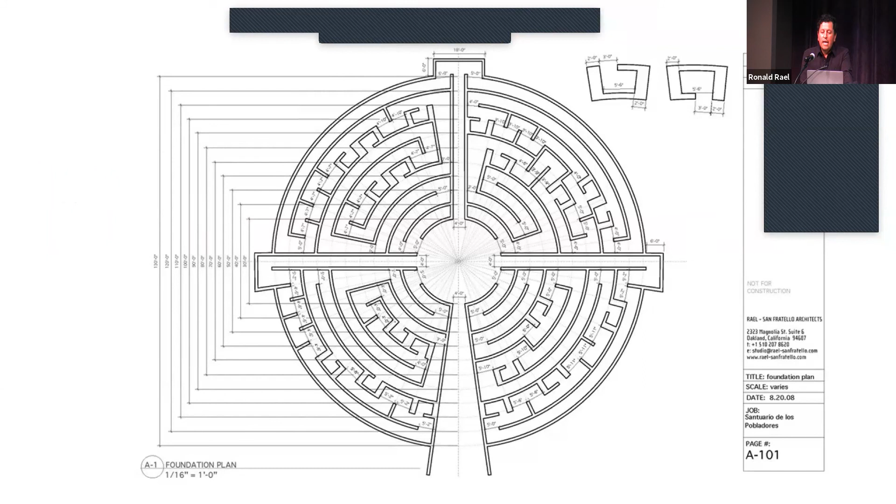But I've also worked on projects here in the San Luis Valley, and this one has been ongoing now for 13 years, in the town of Conejos, where we are building with the community of the Catholic Church there a labyrinth to celebrate and exercise the prayer of the Rosary. It's an enormous project that my creative practice designed 13 years ago, and in that second year it was explored in a smaller scale model using straw bales for the 150th year celebration of that church in Conejos.

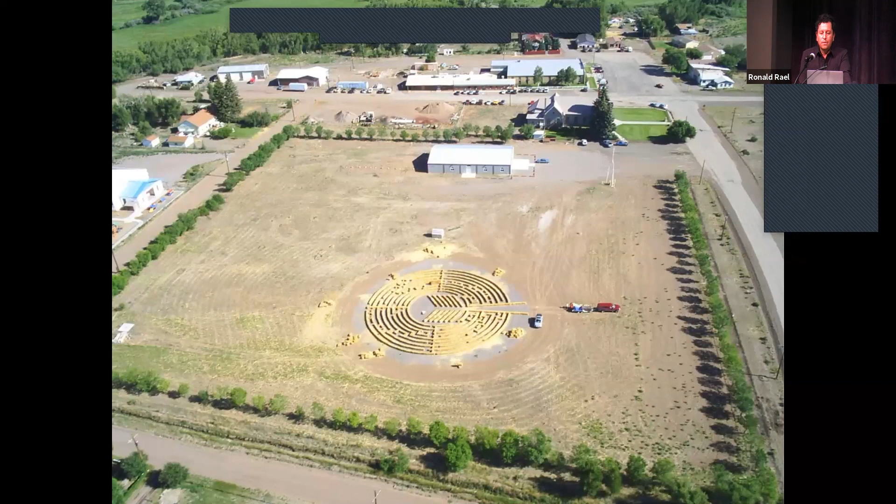And this is what it looked like. To give you some scale—well, I guess I can't move that little thing up there—but you see the size of a hay bale there on the side. So it's extremely large, and the actual one is much larger than that.

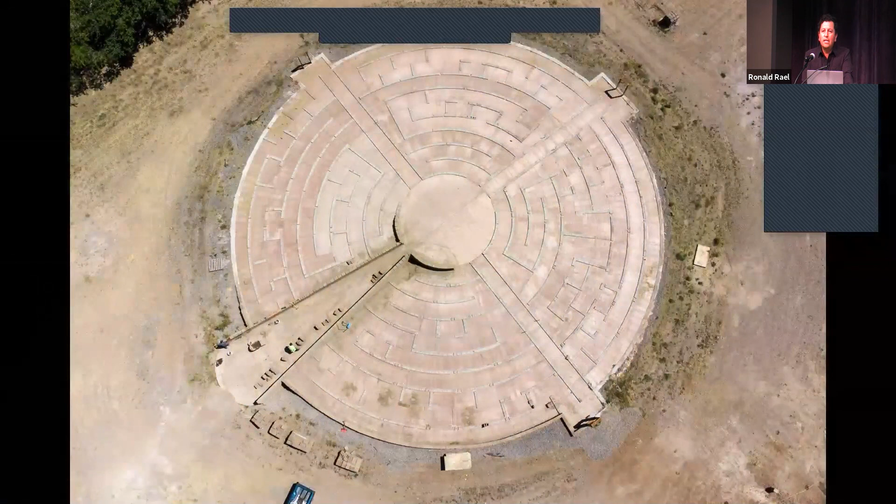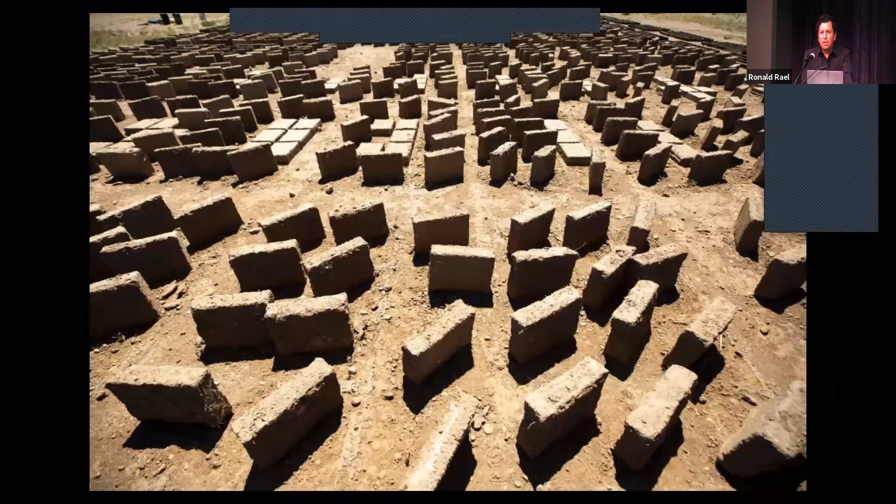In the last two years, it has now been constructed by members of the community in Conejos. One of the things needed to build this labyrinth is to manufacture almost 40,000 adobe bricks, and adobe has been a building material tradition in this valley for a very long time. This task has been taken on by the octogenarian Alfonso Abeyta, making this probably one of the largest adobe construction sites currently in the United States. It's also a project taken on by the entire community to build. So we welcome you to come and visit and see the construction of this labyrinth taking place in Conejos right now, because it is truly going to be a monument.

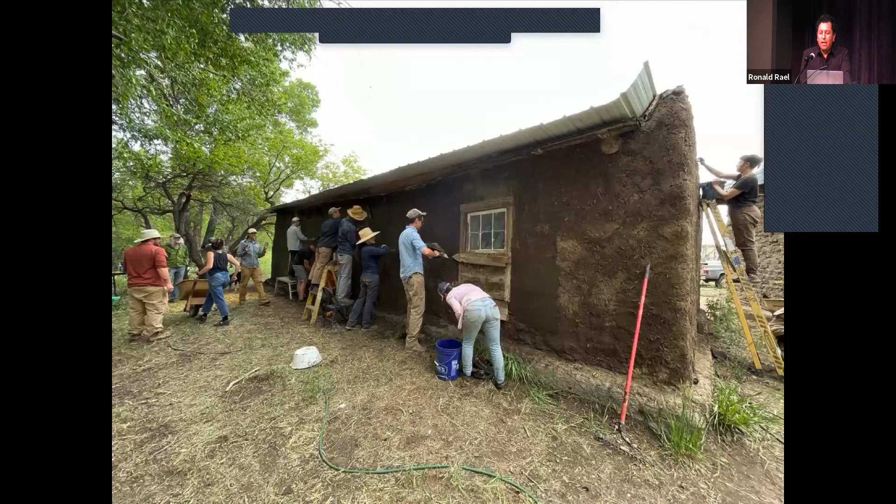Nick mentioned that other projects are happening in Conejos as well, like the restoration of the Lafayette Head Compound and Ute Indian Agency. This is a building and compound built in 1854. It was an expansive site, almost like a fort, not too dissimilar from Fort Garland in some ways, but it was a site that brought together many distinct cultures that defines the founding of the San Luis Valley and of territorial Colorado and New Mexico after the Mexican-American War. It was the Ute Indian Agency, and at that time, when it was constructed in Conejos, there were 3,000 to 4,000 Utes living in Conejos.

And it's also a site where an American soldier named Lafayette Head moved from Abiquiu, New Mexico, along with families from Abiquiu and Ojo Caliente to settle Conejos on the supposition that they could gain the Conejos land grant. These families are more than likely descendants of Genízaro families from those villages, which were Hispanicized Native Americans who were taken into captivity as slaves, and then eventually grew into the villages and families that exist in New Mexico and southern Colorado today.

In this house, there were treaties drawn between the United States and the Ute, and trips from this house to Washington, D.C. to meet Abraham Lincoln. So it's an amazing and important historic site. It's also a site where Lafayette Head himself documented indigenous slavery in Conejos and Costilla counties in the San Luis Valley, making extensive lists of all the captives taken in these counties by families.

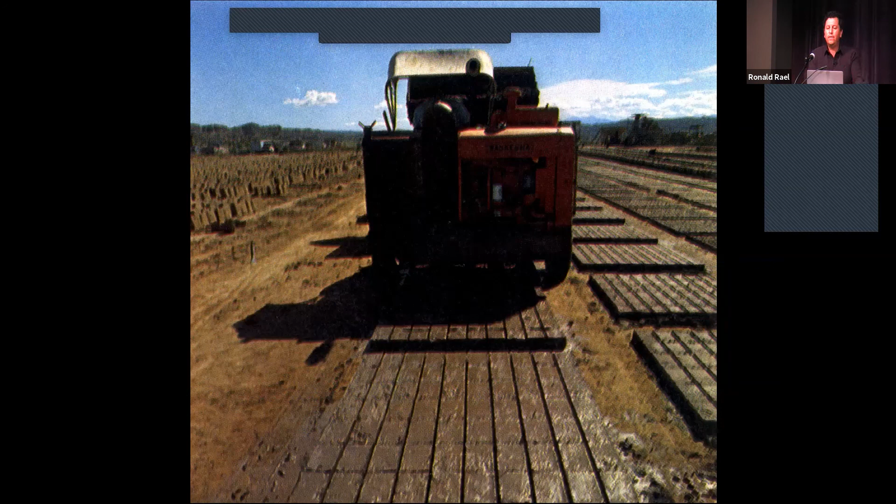We also can see the demand for adobes by people, especially in New Mexico, to build very large adobe houses because of this kind of romanticization. This has produced vehicles that produce 25,000 adobes a day in adobe yards in New Mexico, by driving across the landscape and consuming the earth, leaving that product in its wake.

I've started to explore that in my architectural practice with the design of a house, the first adobe house built in Marfa, Texas, probably in 100 years, made entirely in a traditional way with mud brick adobes and straw plaster, but also very modern, using concrete woven within the building to give it more structural support and to define the way electricity and plumbing is placed.

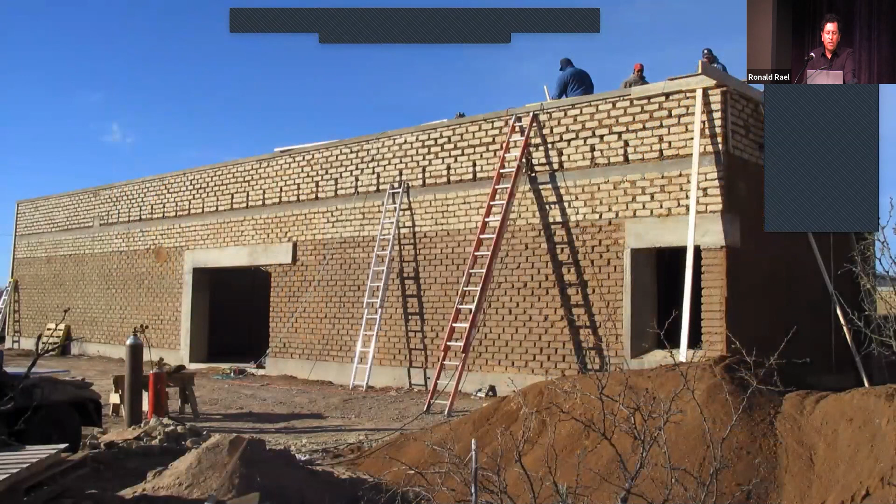It's also a way of thinking about the future of archaeology. The bricks you see on the bottom were manufactured in Albuquerque, New Mexico. They are much stronger, and they cost more. The bricks above the lintel of the door are lighter in color. They were manufactured in Ojinaga, Mexico, and they're not as strong, so they are placed higher, but they're much less expensive.

There's an economy in that building. There is a history in that building. There's a geology in that building. It's interesting to think about these new ways of building as recognizing the impact one has when making things in the environment.

When we were making that particular building, we were invited to make a building that not only includes economy and geology, but also a political dimension.

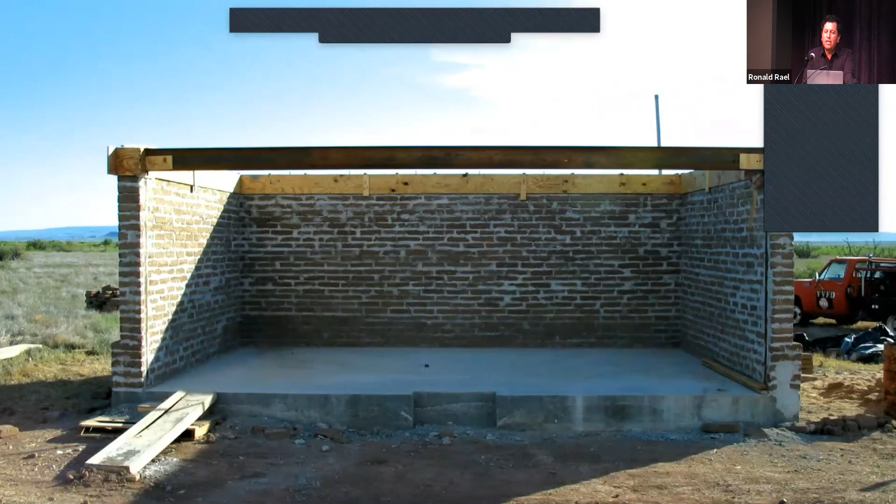We built the building so that every adobe brick is cast in cement mortar, like the military buildings built after the Mexican-American War in Texas, that today are beginning to erode because an adobe doesn't do well when it sits in cement mortar.

But it's also become a cultural icon. What does it mean to think about buildings that become cultural objects? This one became a particularly cultural object when Beyonce jumped in front of it and posted it to her Instagram account, and now everyone who visits jumps in front of the building like this.

Even the Simpson family went on a road trip and stopped by Prada Marfa, and they weren't so interested in the art necessarily, but I know that Homer needed to go behind there and use the restroom.

While we were building this building, we would see helicopters and Border Patrol agents pick up people walking in that desert. And after 9/11, we began to see continued border security along the US-Mexico border because there was a notion that there was no longer a war on drugs, but now a war on terror, and Mexico had something to do with it.

And so that unleashed the 2006 Secure Fence Act, which demanded the construction of 800 miles of wall along that US-Mexico border. This was a law put into action by George W. Bush and has continued since that time.

And so when the leader of the previous regime announced that he is running on a platform to build a wall, in fact, there was already a law passed to build 800 miles of wall, 90% of which had already been constructed by the time he came into office, at a cost of $3.4 billion since 2006. And to complete that project, it would require $49 billion to finish and maintain it over the next 25 years.

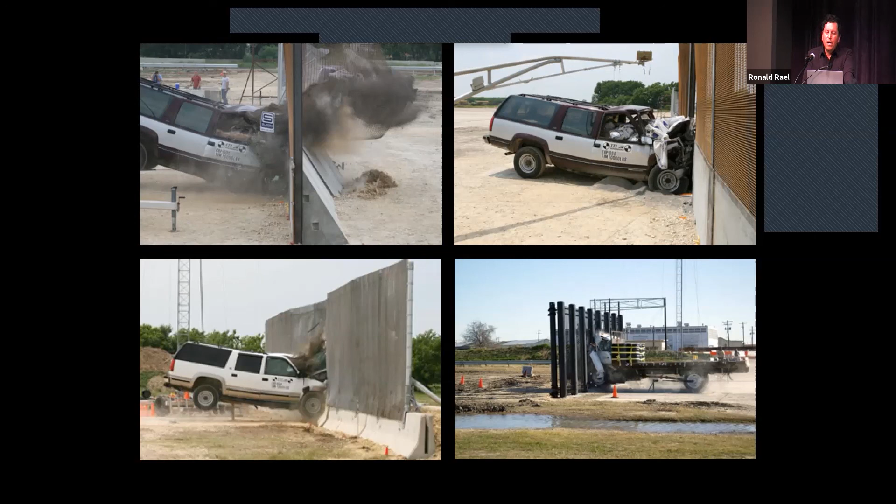Nick mentioned this book, Border Wall as Architecture, and I wondered if the wall is in fact architecture. And what does it mean for it to be architecture? Then it needs to be designed. And who designed that wall? It was designed by an organization called Fence Lab in conjunction with Texas A&M University.

And one of the ways they tested the impermeability of the wall designs that they would make is they would load a vehicle with 40,000 pounds and ram it into the wall at 50 miles an hour to demonstrate how strong these walls were, and at a cost of millions of dollars to make these tests.

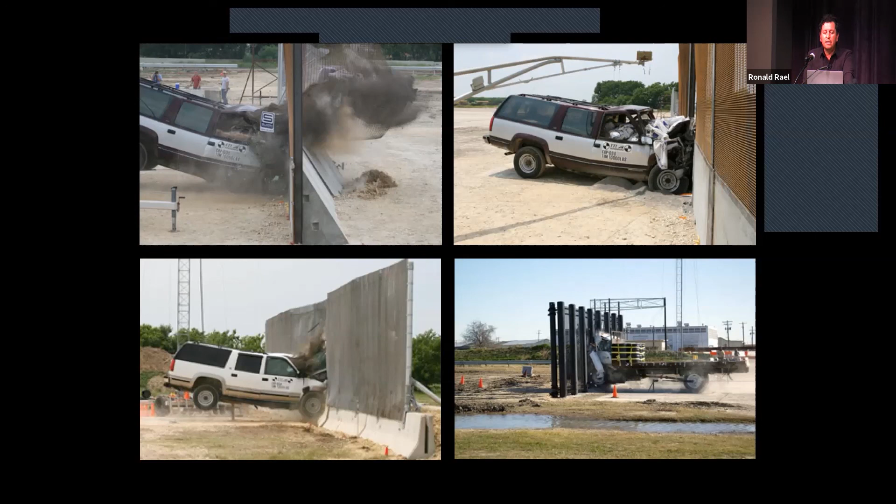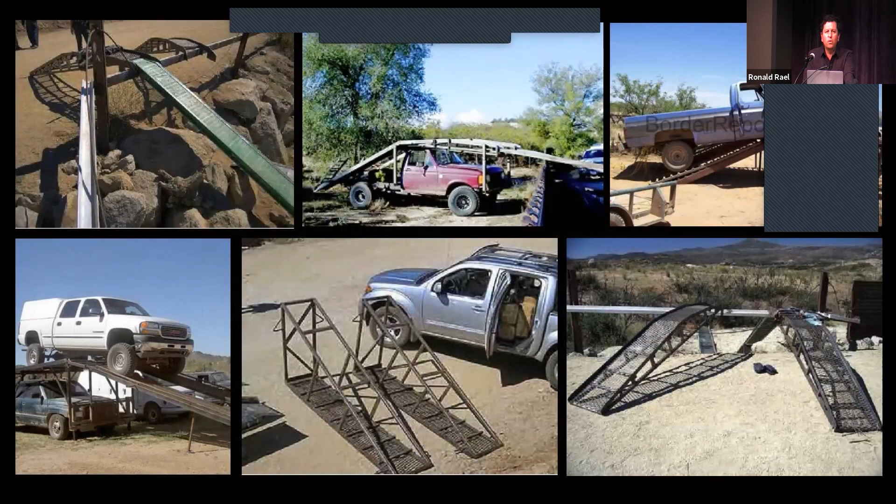And like with all research, especially research related to what I would say militarization research, there is counter research that takes place. And this is the research that's been taking place in Mexico. Portable drawbridges that can be just brought up to the wall so that vehicles can drive right over those border walls, and sometimes really in fantastic ways. And sometimes these research experiments work and sometimes they don't. There's something very both ridiculous and dramatic about this and even funny.

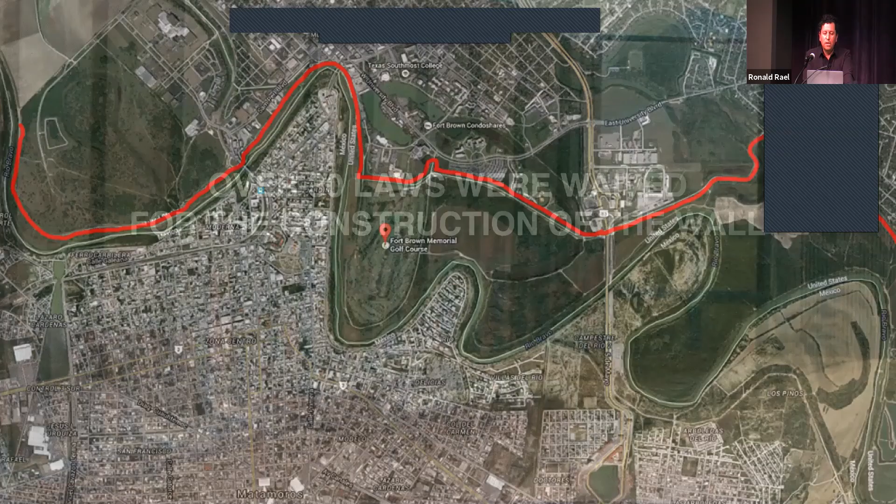But what's not so funny is that the construction of the wall has pushed people to further extremes in the desert. And since 1994, more than 6,000 people have died trying to cross the border because they're pushed to greater extremes in the desert. And over 30 laws were waived for the construction of the wall. This is Native American Heritage Acts, Environmental Protection Acts, Wilderness Acts. The Secure Fence Act of 2006 became the highest law in the land, and nothing, in fact, could stop it or did stop it. It was proposed through university campuses.

And it brings up what I think is another dichotomy of the border, having two sides. One side is about the horror of poverty and xenophobia and racism and the trials and tribulations that immigrants face today. And then it's also about humor, the ridiculousness of many of the things that are happening at the border, but humor as a way to overcome those challenges of the horror.

As I documented stories that were taking place along the border for the last, I guess, 20 years, I began to illustrate these stories and build models of these stories that are part of this book, Border Wall as Architecture, so that we can remember the time that a wall was constructed in the United States, but also to recall what a ridiculous idea that was in the future, and maybe we wouldn't do it again, and to think about the past border that existed prior to that border.

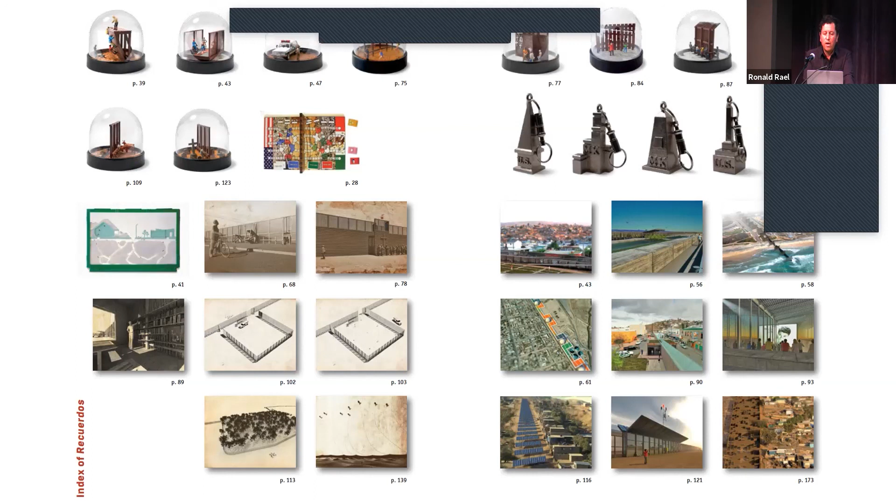I collected stories about Border Patrol agents buying food from a vendor across a money exchange, food exchange, entirely illegal, made illegal by just a couple of centimeters of steel, and made small models just to remember those moments of trading food and stories across the divide, of ideas of using the border wall as an armature for movement of people within cities, since it's kind of a barrier of movement for people, bicycle and pedestrian paths.

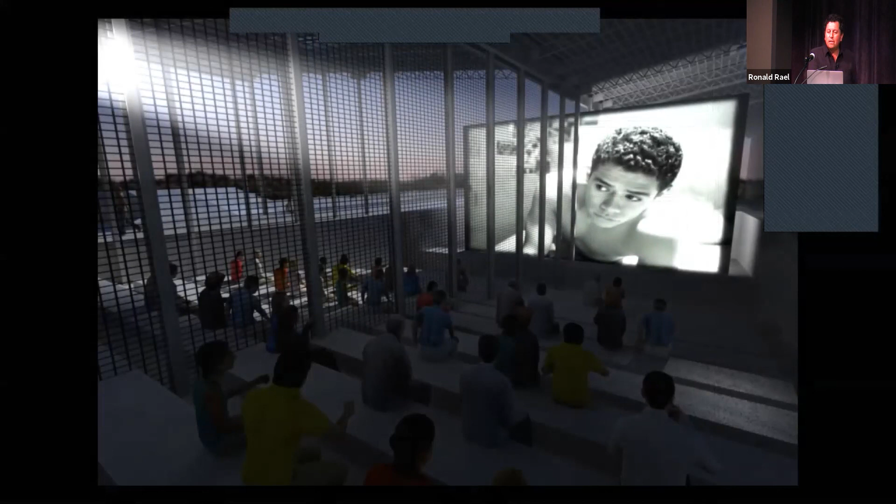Binational libraries where the wall is nothing more than a bookshelf. Seeing the border as a kind of political theater, imagining a theater in which the stage and the screen are split by the wall itself, and audiences and performers are on both sides. Swings attached to the border wall that allow people to journey over to another country before gravity deports them back to their own country.

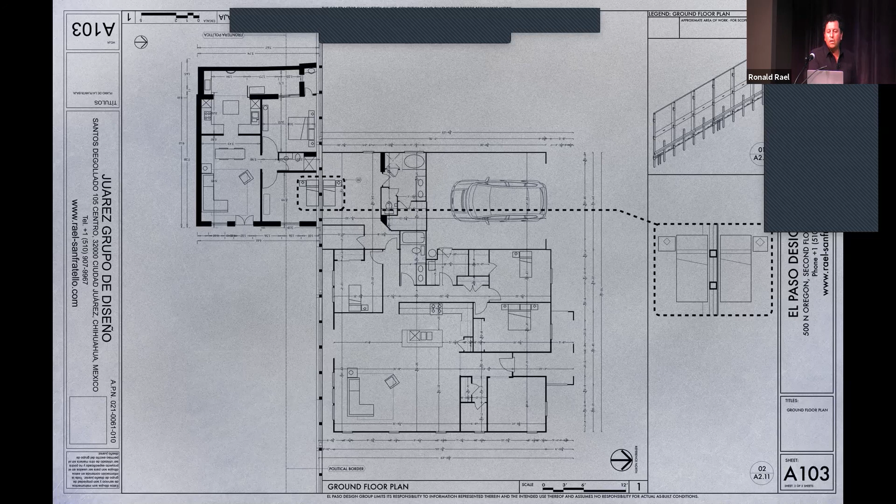And those are the subjects of this book, Borderwall as Architecture. Those are the stories that are told.

When I was wrapping up that book, I was wrapping up a different kind of book. It was related in some ways because it was related to here, where we are tonight, the San Luis Valley, in terms of thinking about the borderlands and the materials for building in the borderlands, but also this Egyptian architect who built in adobe, not only in his homeland of Egypt, but also in this borderland region in New Mexico. He was the designer and builder of the mosque in Abiquiú.

But he had a quote that's attributed to him that I thought worked very well with the book, which was about the fact that he says architects do not design walls, but the spaces between them. And I think it's very important as a designer, as an architect, to think about the spaces that are affected or endangered by the construction of walls or anything that we build today.

So I was finishing a book called Earth Architecture, which focuses on my interest in adobe, rammed earth, and cob. In the final chapter of that book, I wondered what the future of earth architecture might be. At that time, I thought maybe it's 3D printing, because 3D printing wasn't so new in 2006, but it seemed possible to 3D print something like adobe, something like mud. I started a project called Emerging Objects, because I liked the idea that cultural objects could emerge from a technology in a way that hadn't been done before.

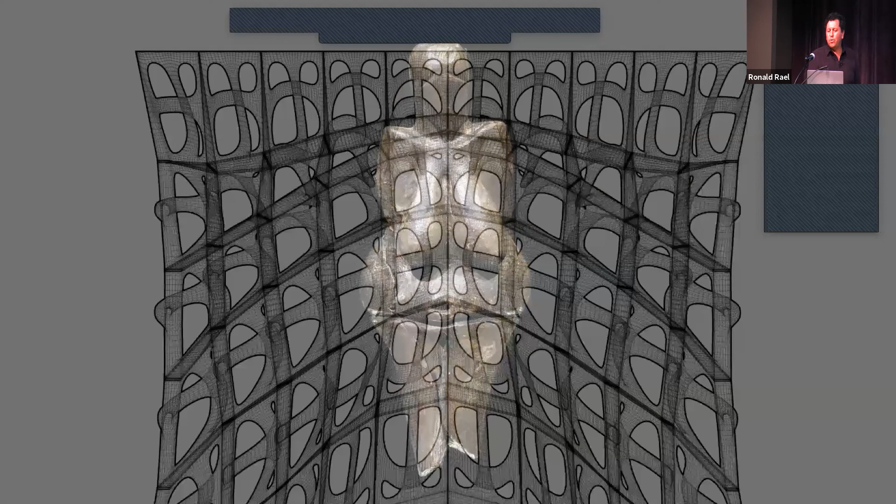This project, Emerging Objects, looked at clay and how we can take a 30,000-year-old tradition of using mud and shaping it, and use 3D printers to reshape that mud and think about what we can do with it. We invented a number of 3D printable materials made out of clay and tested them.

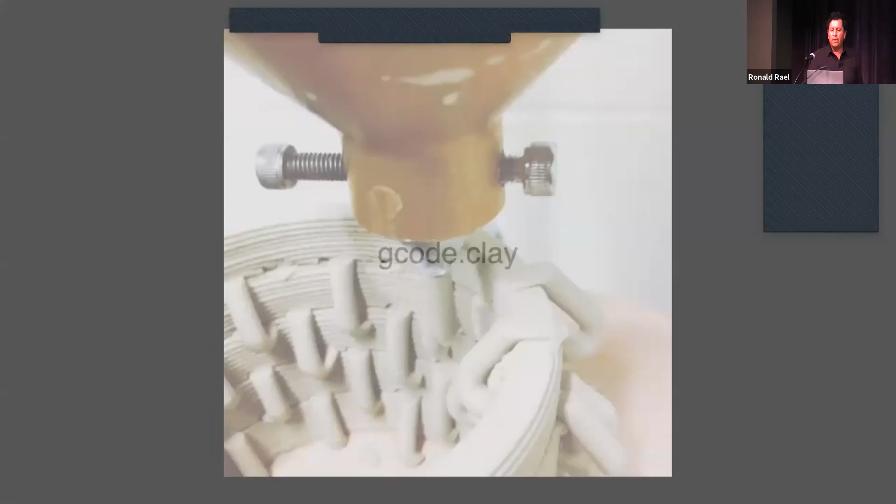It took us into the realm of ceramics to make bricks, weird bricks that might hold plants or water or insulation, or might store water like a sponge and become a swamp cooler effect, but also a building wall. We also began to explore robots and how robots placed mud in the landscape, in a way that maybe you couldn't do with your hand, to make objects that looked like this or like that.

Not knowing what that's good for, but excited about the possibility that you could place mud in different ways that hadn't been placed in the last 10,000 years. We really pushed this technology as a kind of form of science and art, thinking about the mathematics of the movement of a robot and the squeezing out of clay and the kinds of shapes and forms that were made possible by that technology.

It took us on a journey of making things out of clay that became really fantastic. But remembering that I was an architect, wondering what this might be good for, and imagining the possibility that maybe we could build buildings this way, or parts of buildings this way. Maybe we could build buildings that had these kinds of amazing textures and openings, and surfaces and tiles and building blocks that had these kinds of surfaces and textures.

It also took us on a journey of thinking about, in the same way that we can look at the dirt outside and say we could build a brick out of that and make a building out of it, what other building materials are outside? In the San Francisco Bay Area where I live, salt is one of those materials. In the southern part of the San Francisco Bay, there are crystallization plants that produce thousands of tons of salt a year using only sun and wind by drying out these crystallization ponds.

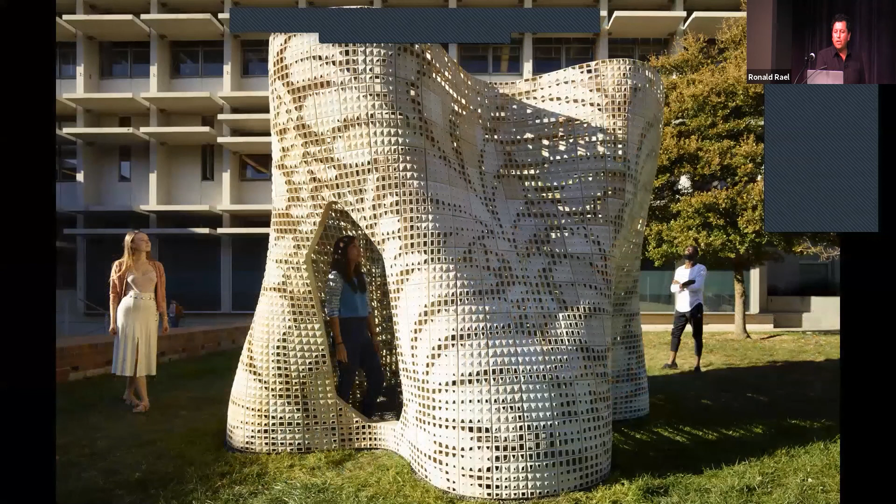Experiments in cement, where we're not using large amounts of water. We're not using any formwork, but we're shaping the cement materials from the powder. We can make complex objects without any molds or forms. We can make furniture, we can make spaces—these are some of the larger things that we've produced. In all these complex textures and surfaces, we're always thinking about the traditions that allowed us to get here in the first place—the beautiful kind of traditions of earth and building that exist not only here in the valley, but all over the world.

So these kinds of environments and experiments we're making, at a certain point we didn't know where they would go, but they've taken shape in many different ways. One way is in the rebuilding of coral reefs around the world.

Those wiggly little clay structures I showed you were something scientists saw when they visited our studio. They saw that we could print many materials and asked us to print coral, scanned from the ocean, out of calcium carbonate, which is what coral produce. This wasn't to restore coral reefs, but just to demonstrate the scanning technology, and that lower pH levels in the ocean actually degrade calcium carbonate.

But when they saw those curly wavy things, they said those are ideal habitat for coral larvae. So we worked with scientists from the Academy of Sciences to produce a series of ceramic designs that would be ideal habitat for coral.

We produced over 4,000 of these ceramic objects of various shapes and sizes that can tumble in the ocean, be dumped off a boat, or be anchored to the bottom. In these little crevices and nubs, tiny coral larvae can take root and grow and thrive, reestablishing coral reefs in a way that's pretty inventive and ingenious. It's being tested now all over the world with a great deal of success.

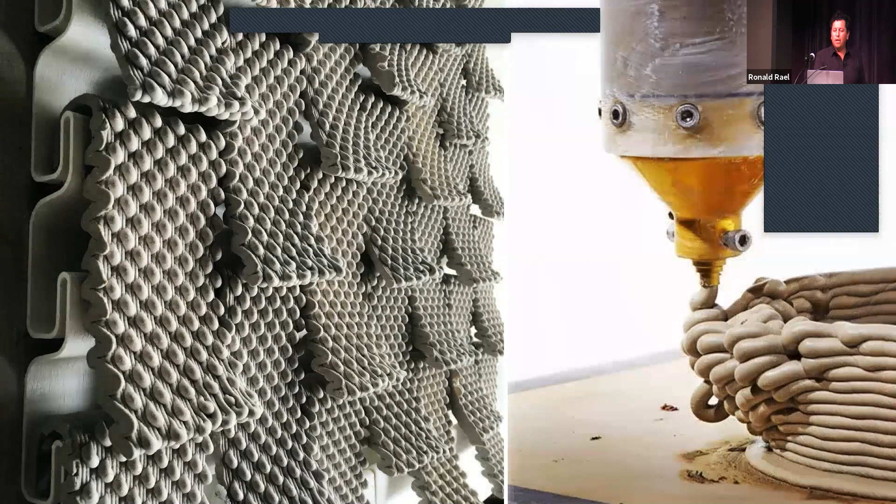4,000 ceramic tiles, 3D printed using this technology, are hung by robots from a 3D printed armature. Every tile looks slightly different, even though in the computer it's the same, but because of this kind of wiggle, it looks really homemade and kind of natural.

The front facade of the building is made out of recycled sawdust, cement, salt, and in some cases Chardonnay grape skins, leftover agricultural waste from wineries in the Napa and Sonoma Valleys, each holding plants that grow and thrive in the Northern California climate. The building itself has taken on its own ecology and has become very much part of the environment itself.

And this is what the Cabin of Curiosity looks like. Even the furniture are things that we began to print.

The translucency of 3D printed bioplastic made of corn allows the interior to be illuminated and becomes a light itself, that we can temper and transform the quality of that space and how you would feel related to light. It takes on a tradition you may have seen here of pressed tin panels, but in this case every panel is different and not replicated, creating these surfaces.

I think we even have coffee cups made out of coffee, on the 3D printed coffee table. So these are experiments that are new ways of building in landscapes that demand new ways of thinking about building, about housing and who is housed and how one can be housed, and efficiencies of space that transform a small space into a place to live and sleep.

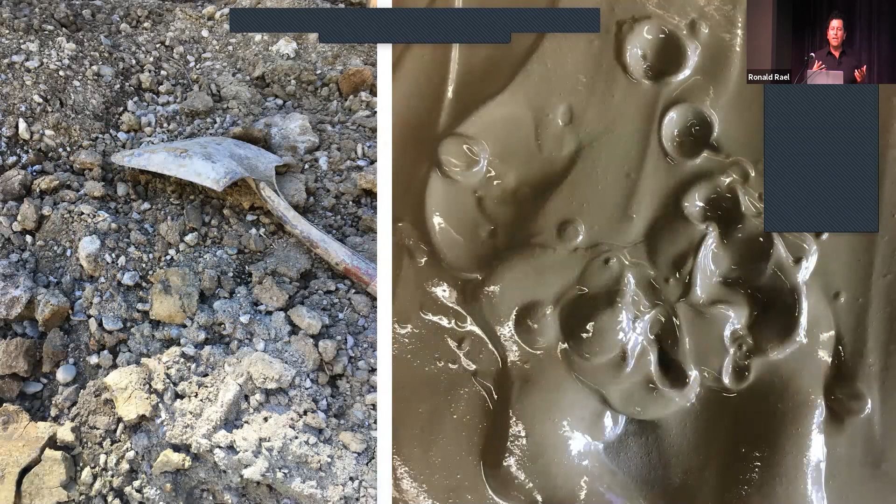We're really fortunate this group collection is now part of the Smithsonian permanent collection at the Renwick. But that idea of bringing things together might be reinforced by an idea of taking clay from Mexico and clay from the United States and making objects.

It also opened up the idea that we would dig that dirt ourselves and not buy those clays from clay shops. So we went out to University of Texas, El Paso. We invited 25 ceramic artists from Juarez and El Paso to walk around with us and dig clay. And we found all these amazing complexions of clay, from whites to browns, tans, even green in one case.

We developed a software that anyone could use that we were using to make these objects. So ceramic potters who did not know anything about using a 3D printer or modeling in a computer could now make really complex, crazy, weird objects. We now sell this software to universities and high schools all over the world so that students can learn 3D printing easily. Those 25 ceramic artists from the two countries made 270 of these beautiful ceramic vessels from the material of their cities and region and landscape.

It also pushed us to think about how we might print much bigger, because the idea from the beginning was: how can we print much larger structures, walls, maybe spaces, maybe buildings themselves? Because this was the idea - could we do this? And one thing we didn't know how to do is make a machine.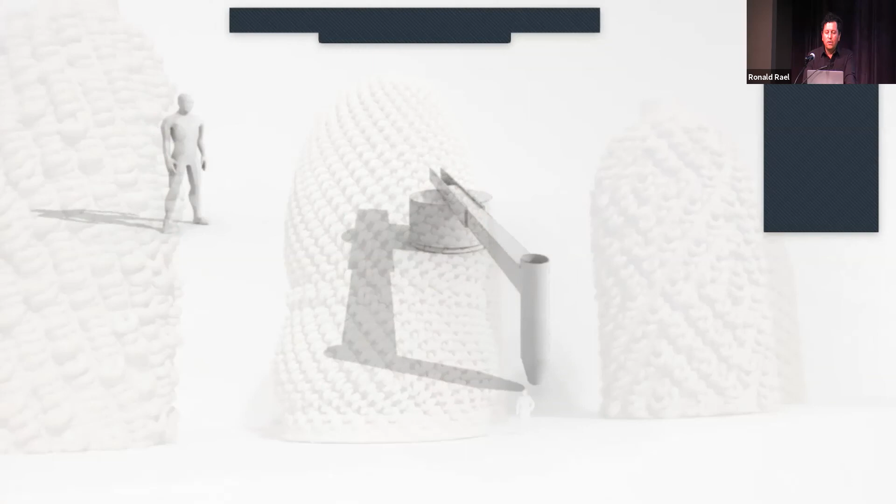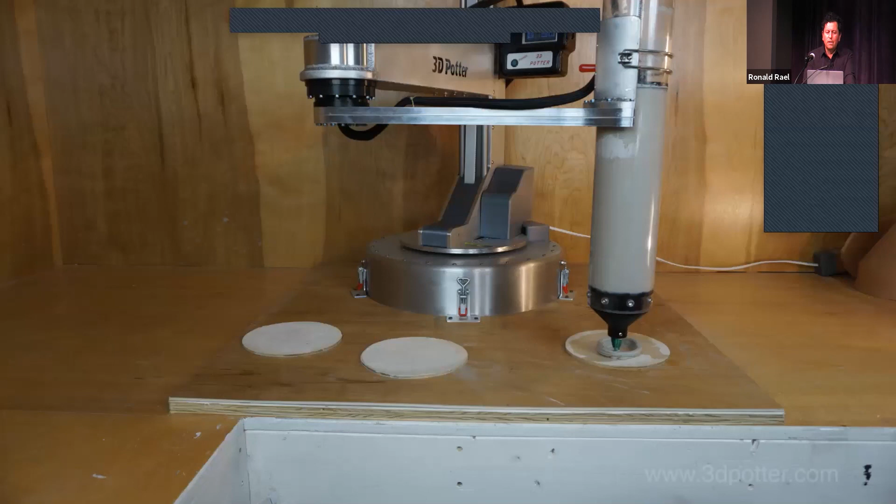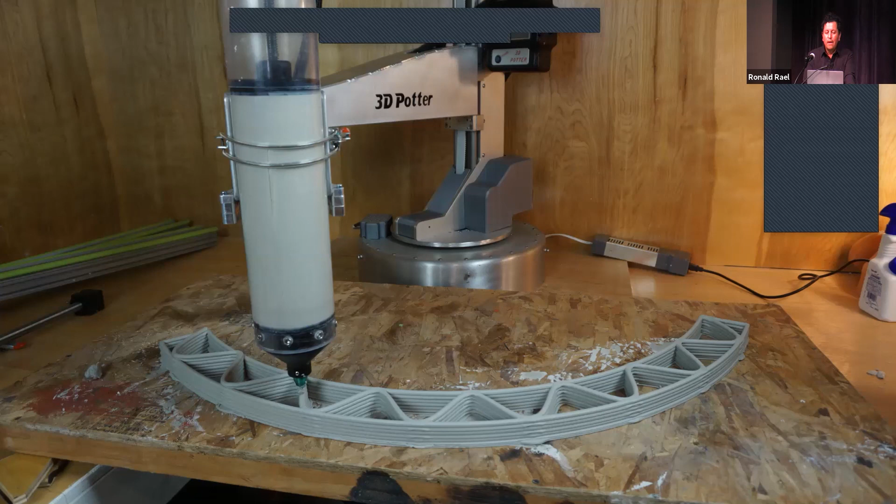So I imagined a machine, a very simple machine that rotated around itself and could deposit adobe. I sent it off to a company that I had been working with who manufactures machines, and they decided they would like to try to make it with us and commercialize it. This was the outcome of it - a weird kind of homemade robot called 3D Potter, and it can make lots of vessels, lots of ceramic objects, but it can also make big objects. And if we can make it even bigger, maybe we can make something like a room, or maybe we can make something like a building.

The other thing we had to do is figure out how we can squeeze lots of adobe through a hose in order to print. So this is a human 3D printer here, and we're testing how we can squeeze adobe through a hose and attach it to a robot.

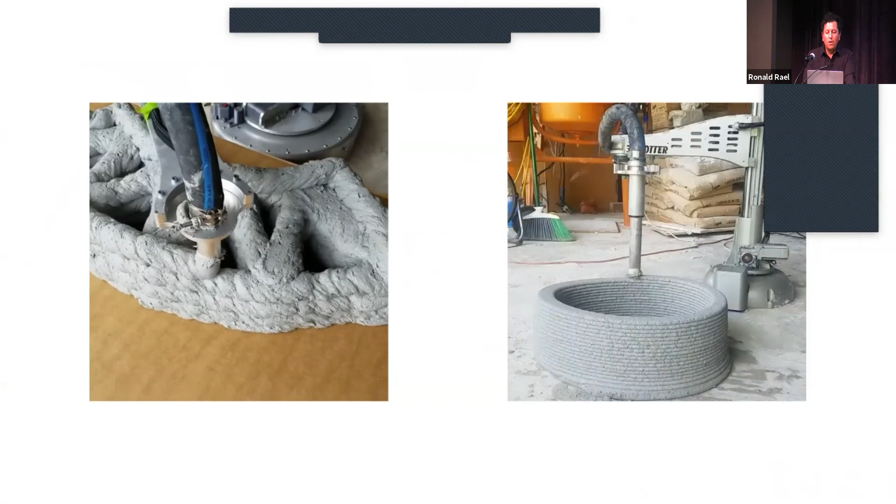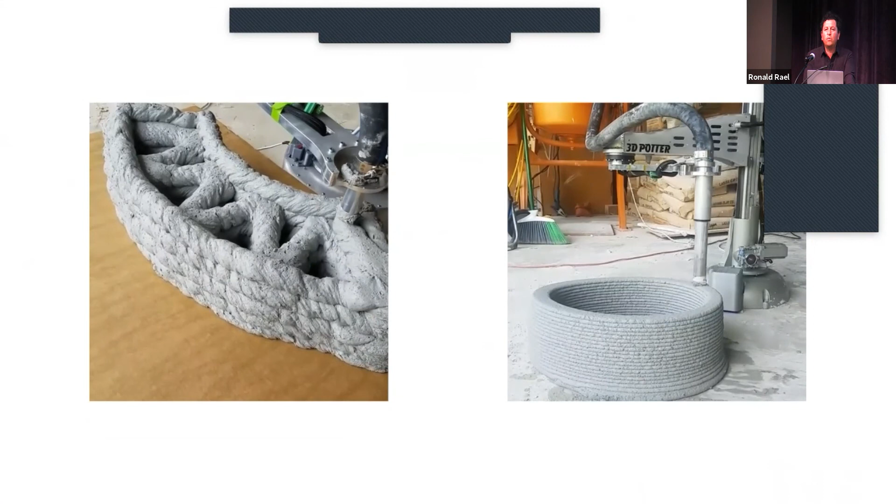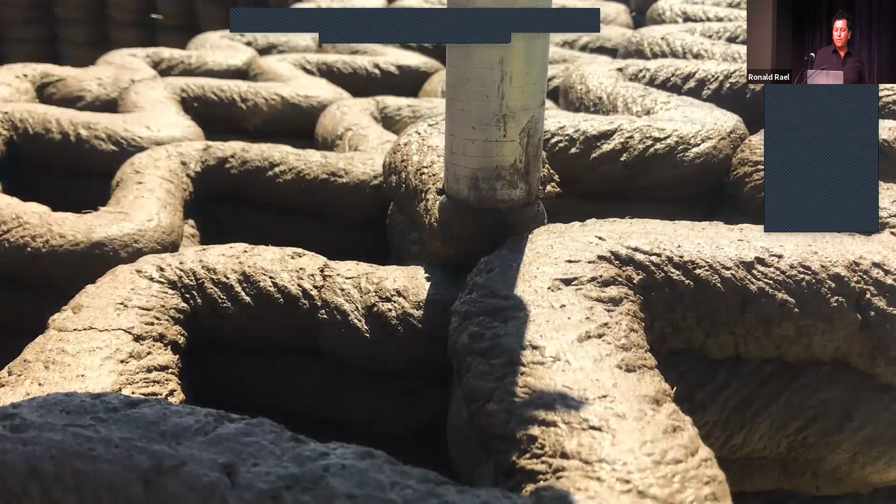We got better and better over the years, to the extent that we became confident enough to bring it here to the San Luis Valley and test in a remote environment, where we could test the frontier of construction by thinking about mud not only as a material, but as something that responded to mobility, the ubiquity of the material, and the democracy of it that allows anyone to build with it. So for the first time in the history of the planet, a robot is building adobe, and it's happening here in the San Luis Valley.

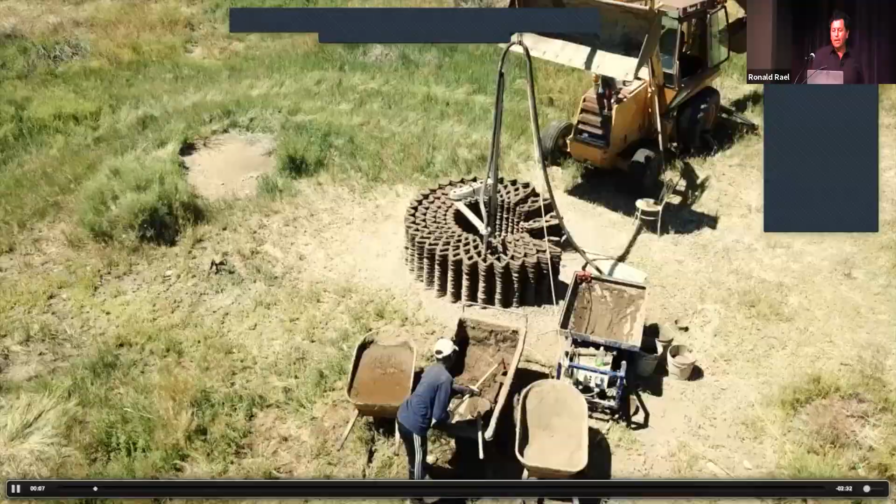And these kind of experiments that we're doing just east of Antonito are experiments that are looking at the past and looking at the future, thinking about how we can make staircases, how we can make pottery, how we can make rooms, how we can make different kinds of structures that look at the future and learn from the past.

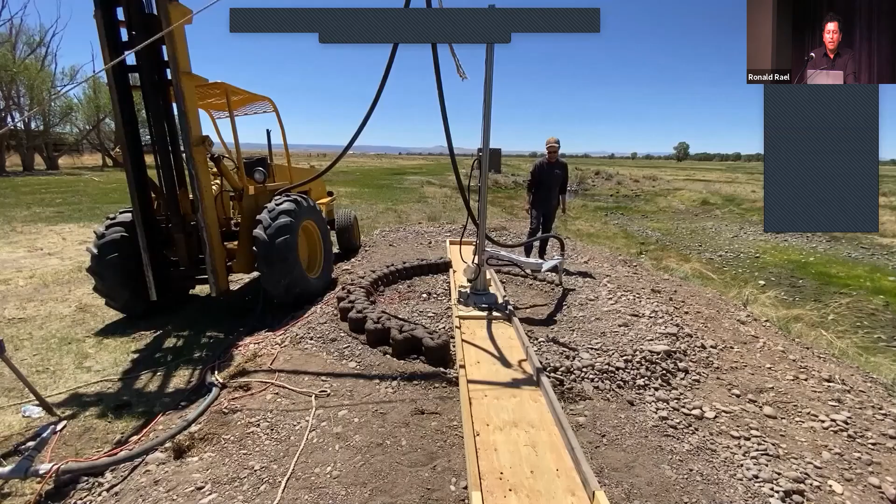I'm going to take you on a quick walk of what became my design studio during COVID. My mother's backyard became my studio. We're digging dirt from the field with the front end loader, mixing it with straw, running it through the machine and making these tests. There are tests about texture, surface, and construction, and ways of making openings, domes and spaces, thinking about how we can move faster with building.

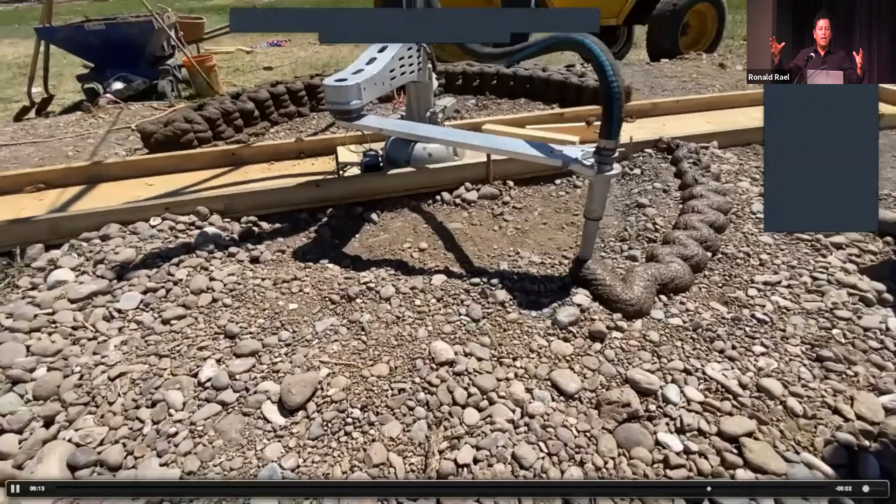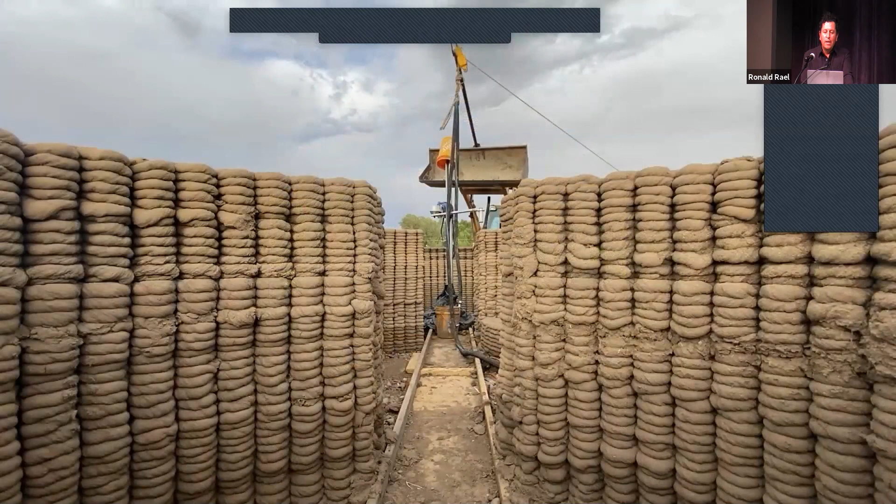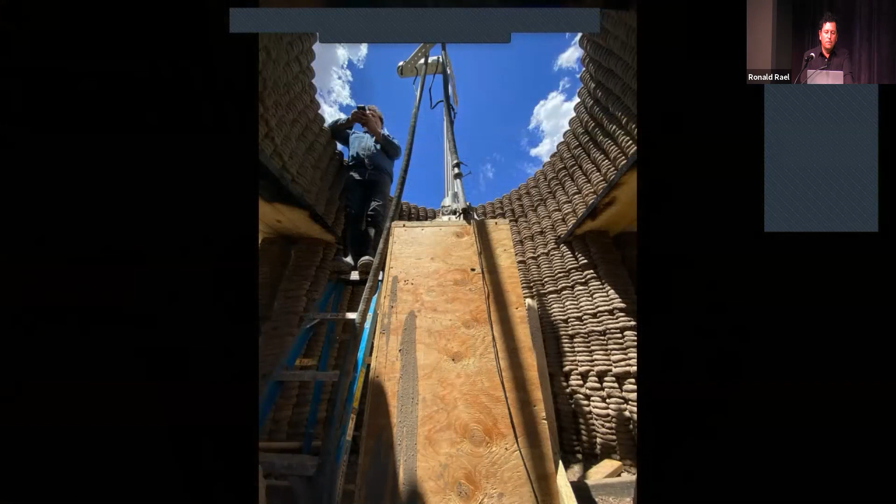In this case, we made this rail on which we could move the robot along. If anyone's built with adobe, you have to let it dry. So we could print a certain amount, move the robot, let it dry, move it, and by the time we come back it's already dried and we can keep building. We can continue that construction nonstop, using the materials right at our feet. I think we used $16 worth of materials for this particular structure, which we control with a cell phone that one person can carry.

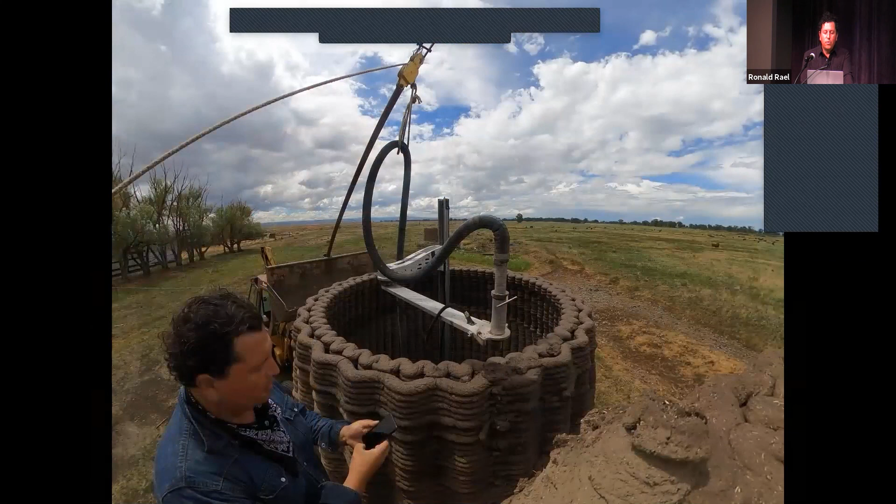Because we built it during the time of COVID, we called this structure Casa Covida. Everybody knows what casa means. Covida means cohabitation, living together, building a place where people can live together during the time of COVID, two people. And this is Casa Covida.

It's a 3-room space, very experimental. It doesn't quite have a roof. Everything's homemade. I collected aluminum cans alongside the road and melted them down and poured them into a 3D print to make the door handles. Beetle kill pine for the doors and the lintels. Friends from New Mexico who shear churro sheep wove the textiles inside the space for sleeping.

A fireplace for cooking, the pottery made out of micaceous New Mexico clay, where you can cook in that pottery itself right over fire without it cracking or breaking. It has been done for thousands of years in this region.

And a place for bathing and looking at the sky and the stars, filling water from our aquifer and heating it. Sunflowers that grow in the field.

And what about a roof? Everybody wants a roof. What about a hybrid roof? A roof that's inflatable, that transforms the spaces in the interior in ways that we may not have expected before, casting this pink color, a kind of cherry on top.

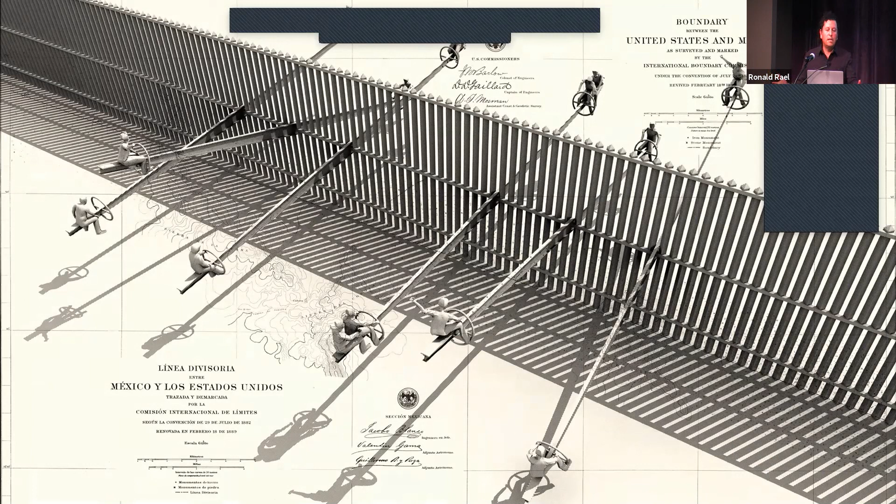And this idea of smuggling design to places was the topic of another illustration that we made for the book Borderwall as Architecture called Teeter-Totter Wall. And it was a story or an illustration that just imagined the border as a metaphorical fulcrum between US and Mexico relationships, and the equities and inequities, the imbalance or balance between poverty and wealth, between labor and trade. And this was the illustration that was made in 2010.

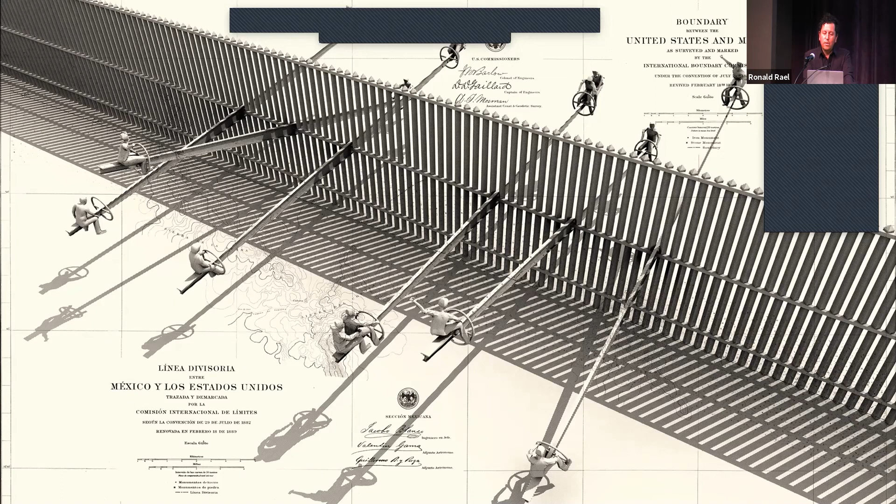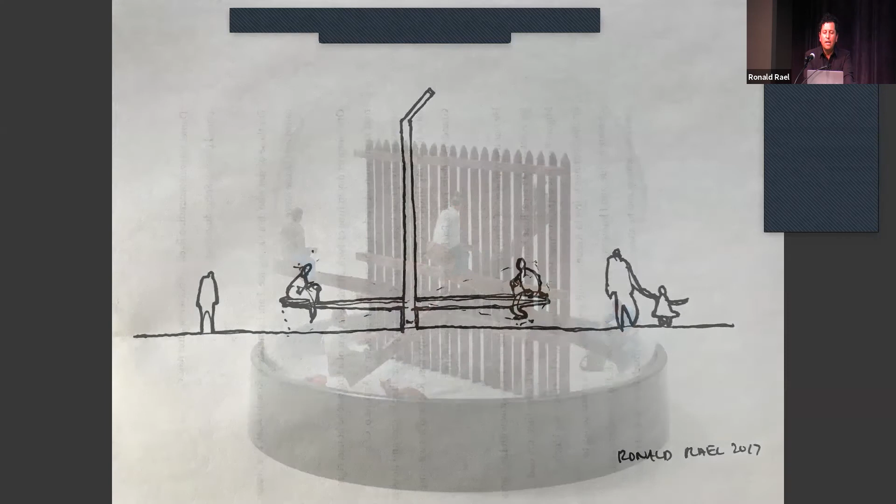And this was the model called Teeter-Totter Wall that was made. And these particular drawings and models from that book caught a lot of attention. And in some cases, we were invited to see if it was possible to actually make this.

And we were invited by arts organizations along the border and worked with communities and cities and the Department of Homeland Security and Border Patrol to see if something like this could ever be possible. And the Department of Homeland Security and Border Patrol always said, absolutely not, never.

But because we build things in the world and like to think about new ways of building, we wondered, what would it mean to actually build something like this? Like an architect thinks about the soil when they're making a foundation, or the climate when they're thinking about the amount of insulation in the wall. What are the issues that we would have to consider when building a teeter-totter on the wall?

How would it slip through? How would you add the seats and the handlebars? What are the dimensions of it? We even measured how long it would take for Border Patrol to arrive if we were carrying a large object to the wall from the United States or from Mexico. And we had all those numbers, about 8 or so minutes on the US side, even faster on the Mexican side, the US Border Patrol would come.

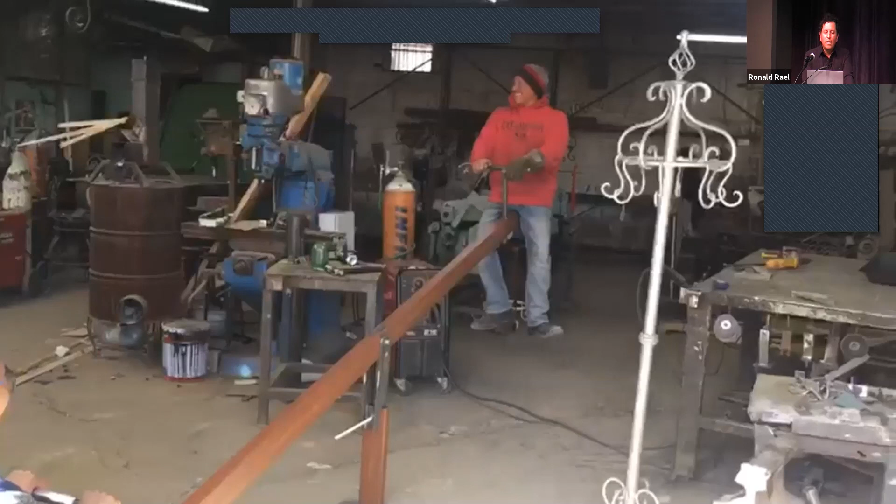And because we had all that information and data and measurements, we decided to work with friends in Juarez to make the teeter-totter, to build it as designed. This is the first ride of the teeter-totter. We worked with community members there, a collective that makes housing for the poor in Juarez called Colectivo Chopeke.

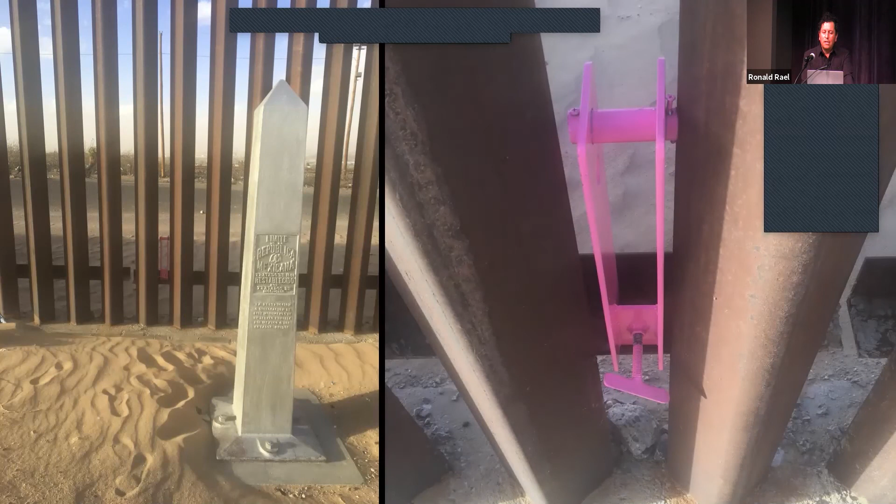And we talked about how we might smuggle this to the wall and what that would mean and what communities would come to the wall. And this is no longer a metaphorical fulcrum, but now this is the literal fulcrum, potentially for US-Mexico relations, and the way it's attached to the steel wall.

We thought a lot about the color of it. It was interesting to us that we could take the same material the wall was made of, a tube of steel, and turn it in another direction so it could not become a barrier anymore, but become a bridge. What did it mean to use that same material to connect people rather than divide them? And would changing its color perhaps change its meaning?

We thought about colors that would stand apart, like bright orange or white, and we ultimately decided collectively to paint it bright pink, because we wanted to remember that even though this was a piece of playground equipment and an act of play, it was also a site of violence. In Juarez, anytime you see a pink cross, it remembers the women who were killed during the time when Juarez was the most violent city in the world.

We never planned to install it, but with the continued conversation about more wall construction and the separation of more children from their families, we simply woke up one day and got together with communities and families in Juarez and El Paso, and we took those objects to the wall. This is how it went down.

I wish there was sound, but I think there's not. No. Well, I'll just narrate what you're seeing.